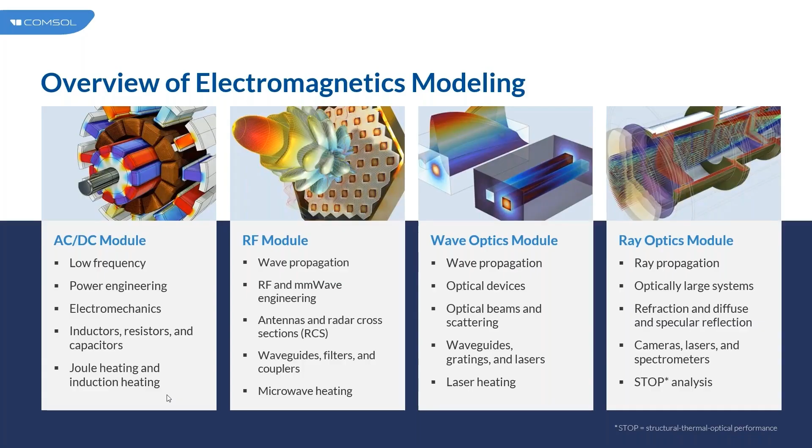Sometimes it's also worth using a small device scale to actually measure the composite behavior of something like this capacitive touchscreen. And for the RF technology, you would want to simulate the underlying antenna and communications going on within this device. So you may also be looking at the wavelength scale, as in this patch antenna that we have demonstrated.

All of this can be done in COMSOL Multiphysics in various fashions. You can have these individual small unit cells, you can have the larger composite geometry, and depending on your particular types of analysis, you can choose what portions of the device you would like to simulate, as well as what sorts of approximations you may want to make.

For example, simulations in just a 1D geometry if you have some type of transmission line behavior, 2D geometries if you have translational symmetry, perhaps a 2D axisymmetric geometry if you happen to have rotational cylindrical symmetry, as well as full 3D simulations, which perhaps is the most common, as in many cases our CAD files don't necessarily have any particular symmetry that you can exploit.

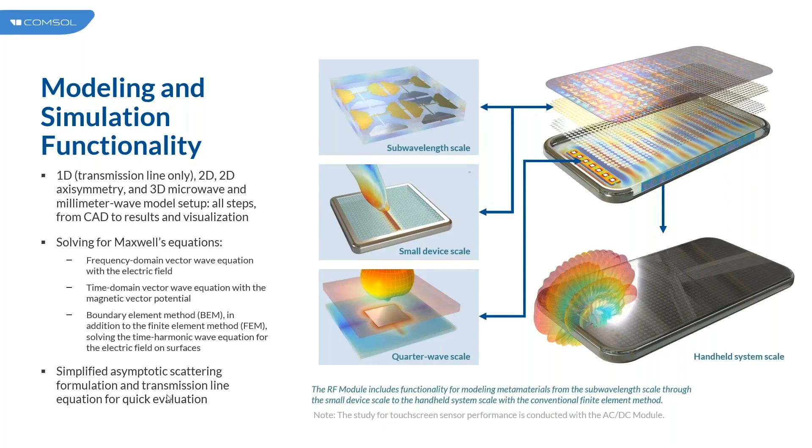As the scales get truly large, you also need to factor in exactly how you want to consider that. As I mentioned on the previous slide, you have the choice between the finite element method and the boundary element method. Generally speaking, the finite element method is a bit more general. It can be used very well when you have inhomogeneous material properties, and that's particularly relevant when you have heating in your model, as the temperature distribution will lead to gradients in your material properties. Finite element method can handle that extremely well.

But as those model sizes get large, it can be very helpful from a computational perspective to increase the discretization order of your solution. That basically means solving at a higher and higher order polynomial that allows you to have a coarser and coarser mesh to simulate these larger structures in an efficient manner. On the other hand, we also have the boundary element method, and this will scale very well with size because you only need to mesh the surfaces of structures.

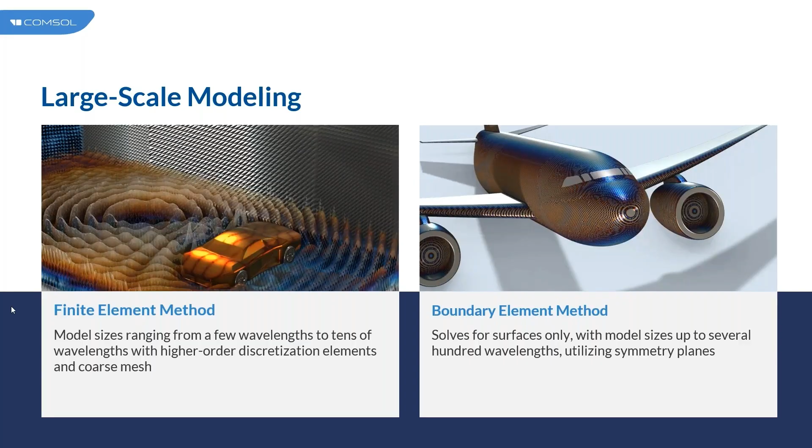For example, in this airplane RCS simulation that you see on the right-hand side, you can see that we are talking about more like hundreds of wavelengths of simulation here. And again, the computational efficiency is obtained there because with BEM, you only need to mesh surfaces instead of volumes. Of course, you can also combine these two approaches into what we call hybrid FEM-BEM modeling, where you have both the advantages of the finite element method as well as the advantages of the boundary element method.

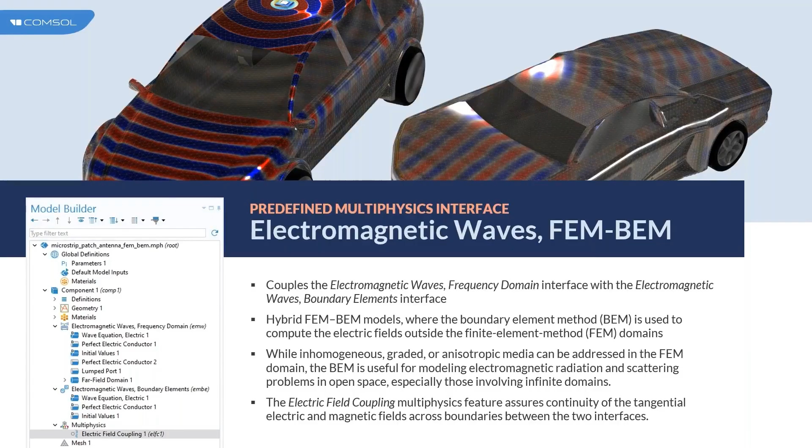And in particular here, you see that we do have two interfaces, the Electromagnetic Waves, Frequency Domain interface. That's what the FEM solution will come from, as well as the Electromagnetic Waves, Boundary Elements interface. And under the Multiphysics section, we have the electric field coupling that automatically handles the coupling between these two interfaces for you.

Of course, ultimately, we're here because we want to look at multiphysics effects. Heating is the canonical case of that. Everyone is very interested in their particular device plus heat. As you put more power into your device, you may obtain better performance, but at some point, you need to factor in the thermal effects. Will the material properties start to change? As conductors heat up, the conductivity will decrease. What impact does that have on our simulations? Or, what is potentially more an everyday scenario?

Again, it's going to be the same interface, the same workflow, all the same steps, regardless of the fact that we are now incorporating thermal effects in addition to the electromagnetic ones. And when we solve these thermal problems, this is typically done in the frequency domain for RF problems, but we need to consider the disparate timescales.

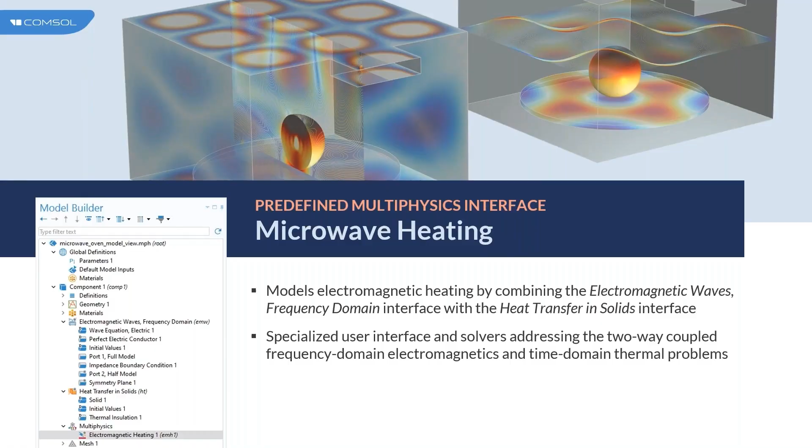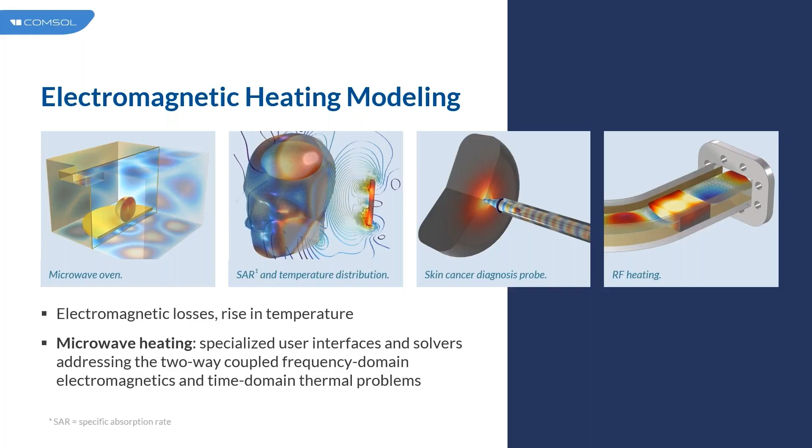We can do things in the biomedical realm, skin cancer diagnosis, or simply RF heating. Maybe you have some type of waveguide, and of course you have conductivity losses in the metal itself. That can all be accounted for in COMSOL Multiphysics.

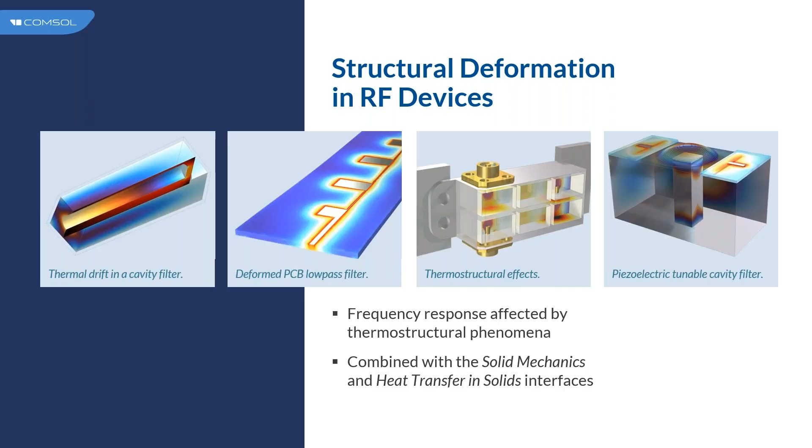You may also be looking at many of the other applications that you see here. I actually think the MRI coil is a particularly interesting one as well, when you start figuring in the effects of passive medical devices inside of an MRI. Will it cause tissue necrosis and that sort of thing?

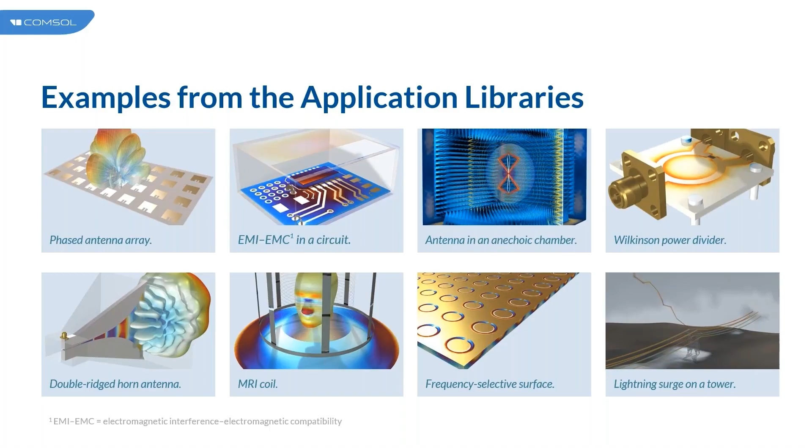All right, at this point, we're going to turn to the previously mentioned example of an antenna array and take a look at what a fully developed COMSOL model of this will look like. And there's a few issues to discuss here. The first is that we're going to excite this structure with a lumped port. This is a very good approximation when your waveguide excitation is much, much smaller than a wavelength.

We're going to account for the outgoing radiation using a scattering boundary condition that basically allows us to have a finite simulation space while still approximating radiation outgoing to infinity.

What we're also going to do in this model is actually demonstrate two different approaches. In one case, we're going to do a full simulation of this 8x4 array and show what that full fidelity model looks like. Of course, the downside of that approach is that more computational resources are required to do that simulation of the full device.

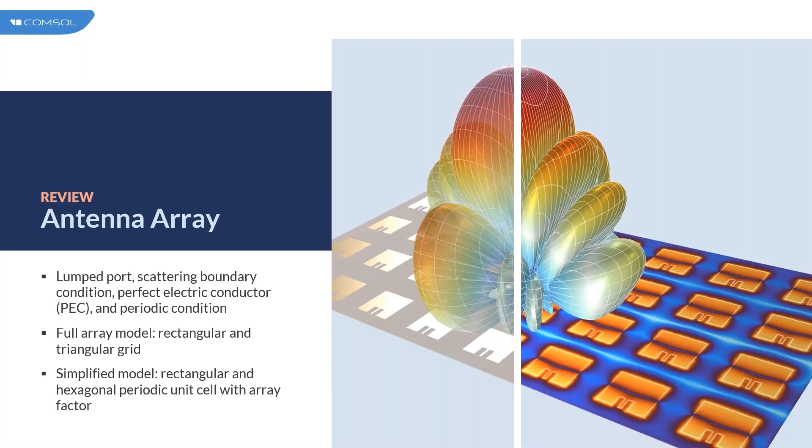And so we're also then going to show a secondary simulation where we only model one individual unit cell and instead use the antenna array factor to generate the radiation profile of the full 32 element array from that one individual element. And of course, as a last step, we will demonstrate the agreement between these two approaches to show that the simplified model of an individual unit cell is a valid approximation.

And so now I've opened up a screen of COMSOL Multiphysics, and we see the exact plot we saw from the slide. In this particular simulation, we're actually applying two different phase shifts to the antenna array to demonstrate beam steering. And so here we see the agreement for an emission at normal angle of incidence. This is a 90-degree angle directly off from the antenna array. And as we change the phase profile, we actually can instead do this emission at a 60-degree angle. And we do see very good agreement between these two approaches.

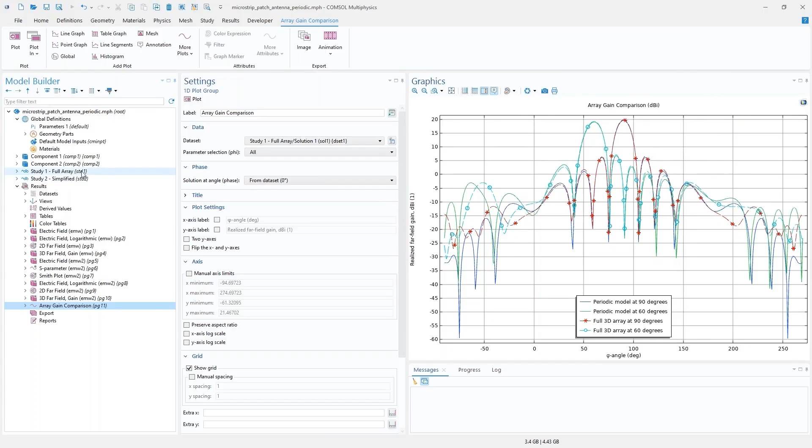So let's take a quick look at how this is set up. Here we have the first component, and we do see the full 32-element array, as I mentioned earlier. The workflow in COMSOL is top-down, and so we'll build our geometry, assign our material properties. In this case, you see it's just a PCB substrate surrounded by air.

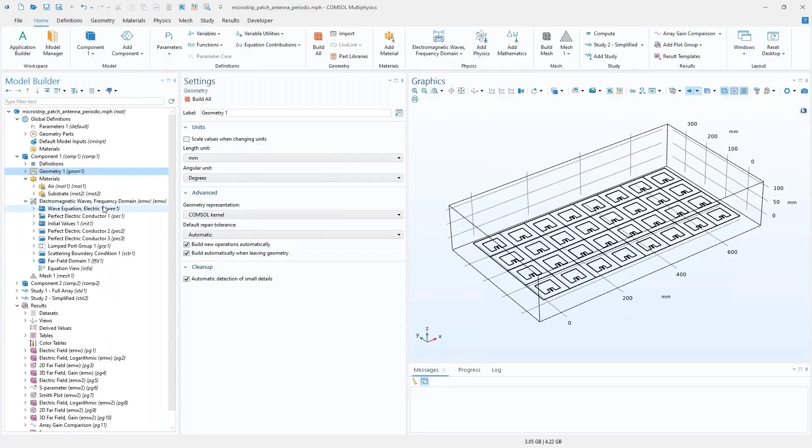Under this interface here, we have the physics assignments. We have a PEC ground plane, which we're just using for demonstration purposes, as well as assigning a PEC to the patch antenna itself. This lumped port group node is the 32 excitations to these individual elements. And as mentioned on the previous slides, we have the scattering boundary condition to handle the outgoing radiation and a far field domain node to calculate the far field radiated profile.

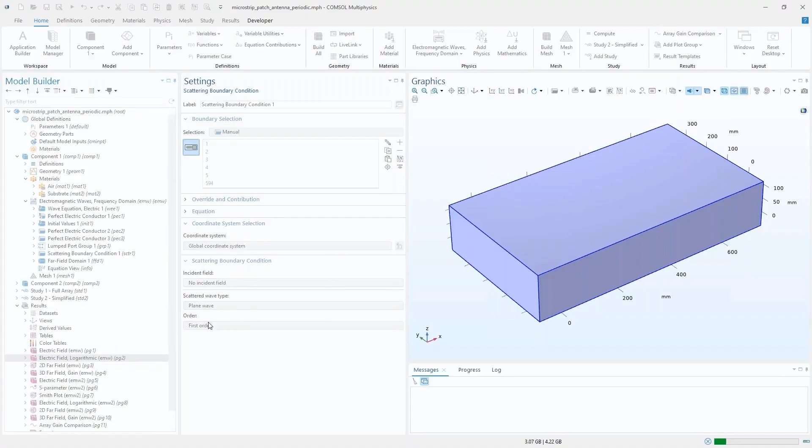We can see quickly what these simulation results look like. Now I'm loading up a quick plot of the electric field profile. Actually, let's look at this plot here instead, which is actually demonstrating the electric field in the Z orientation on all of these patches. And you can see that we have this variation left to right with the phase parameter.

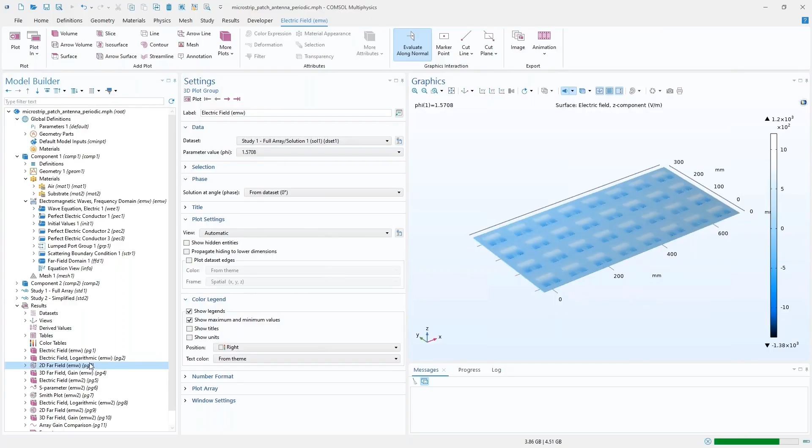If we change this to a different phase shift, we're now looking at uniform excitation, and we do see uniform profiles on these elements. We can also look at the beam steering with a 2D far field plot here.

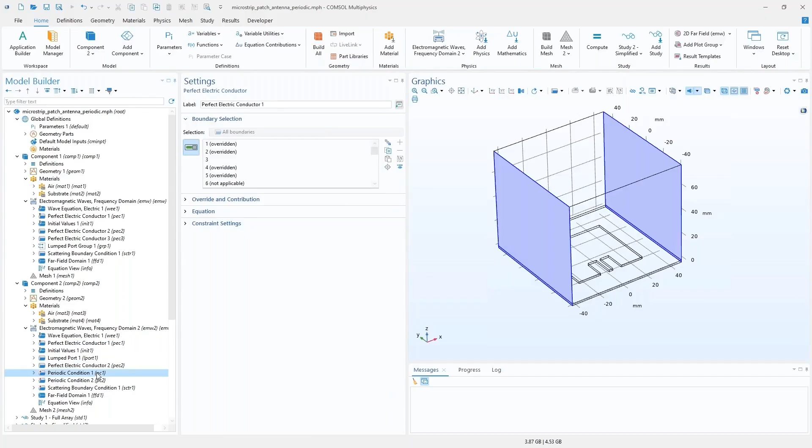For the second component, this is where we are simulating just an individual unit cell. We again have the air and substrate as we did before, but now we only have one individual lumped port because we only have one element that we're simulating. But as before, we have PEC for the patch as well as for the ground plane. On the left and right-hand sides, we're now using the periodic condition to approximate an individual element. We again have the scattering boundary condition and the far field domain calculation.

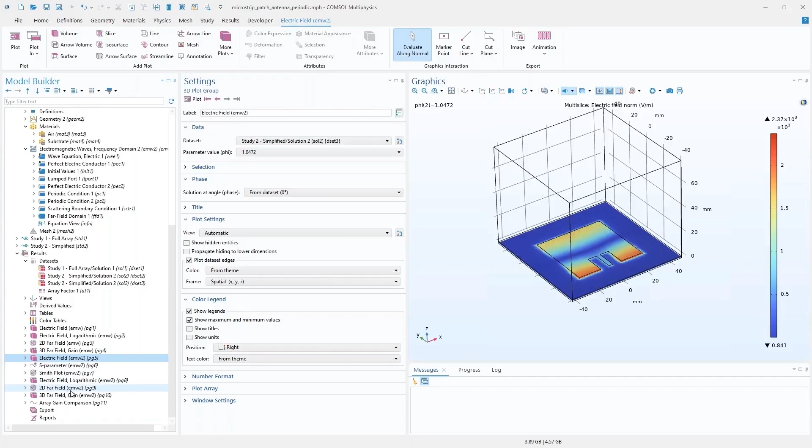If we go and look at the field profiles here, you can see again, we're solving for just one individual element. But what we then do is we create this array factor data set that allows us to generate what the far field emission would look like for the 32 element, the 4x8 array. And again, we can go and look at these comparisons here. We do see good agreement between them there, as well as here in a 2D cross section.

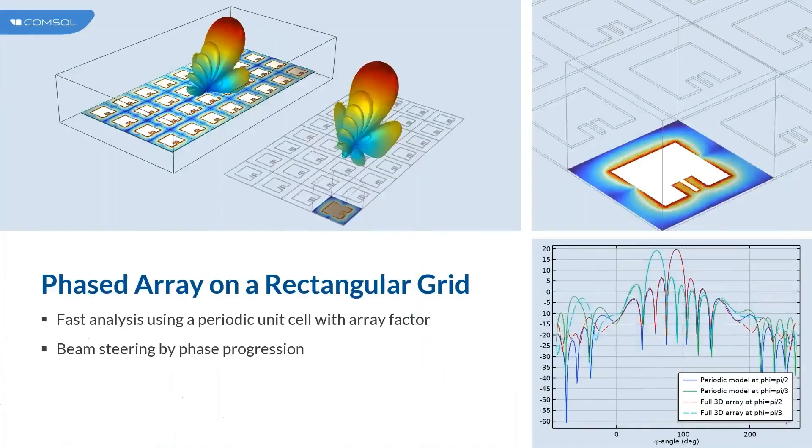Going back to our slides, we also can do arrays for triangular grids. It's very common in satellite applications, as well as in other fields, to have hexagonal arrays. And that can also be simulated in COMSOL Multiphysics. You can both simulate a hexagonal unit cell and then also apply the hexagonal array factor, similar to what we did in the previous demonstration.

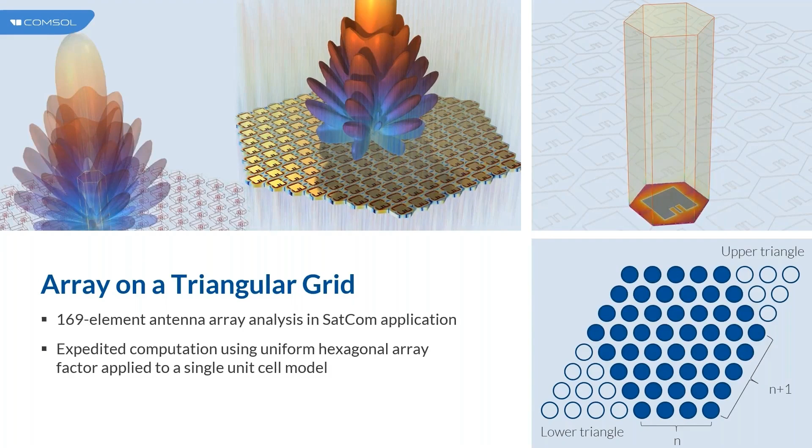It does not necessarily have to be a Cartesian rectangular unit cell as well as a rectangular array factor. It is indeed implemented more generally than that in COMSOL. Turning our attention now again to the multiphysics effects, we're going to look at the thermostructural effects on a cavity filter. We again see the model builder on the left-hand side.

We're again solving our electromagnetic waves frequency domain interface, but notice now that we have a solid mechanics interface and a heat transfer in solids interface with the thermal expansion multiphysics coupling. That's what will take the thermal effects calculated from heat transfer and apply them as structural stresses, thermal stresses in the solid mechanics interface.

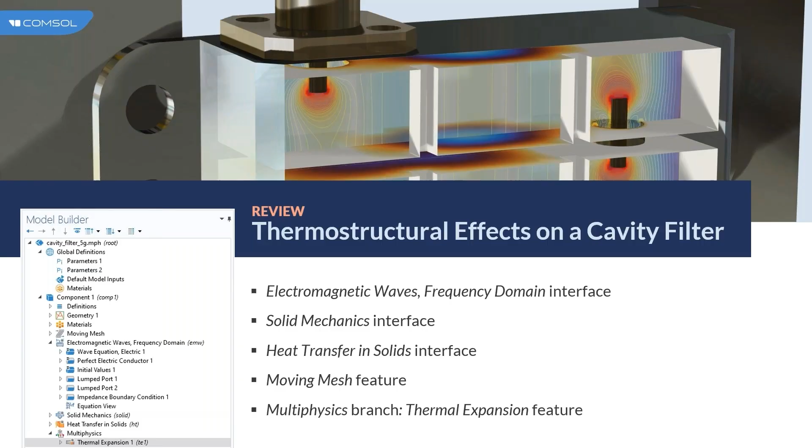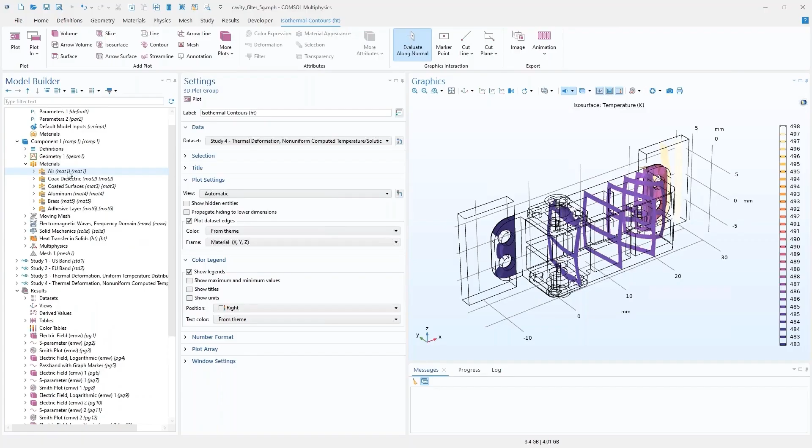Opening the structure here, we can see there's a few isothermal contours, but let's actually go and take a look at the model itself. Similar to what we had before, we have material properties assignments. So you see that we have air inside the cavity filter. We have some dielectric for the interior of our coaxial connections. We have some coated surface. This is just inducing a little bit of conductivity on the inside surfaces. And notice that this is indeed a temperature dependent property.

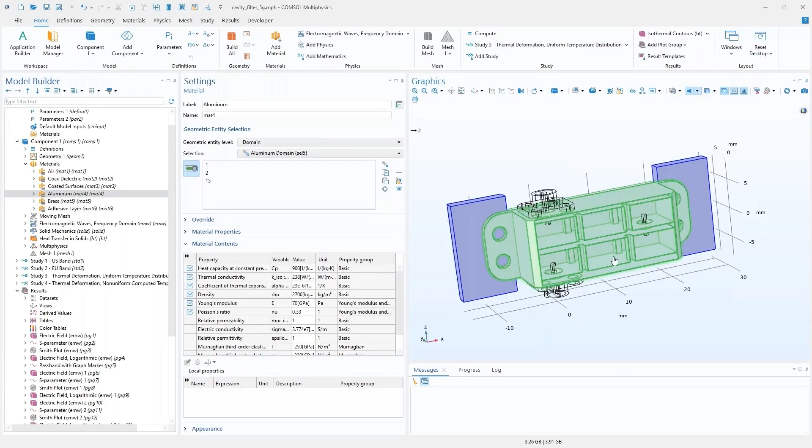The bulk of the filter is aluminum. I should say this front surface here has been hidden. That's why we can actually see into the cavity. We have some adhesive layers as well as brass for our connectors. The electromagnetic setup is relatively straightforward. We have a coaxial feed on the bottom side. We have a coaxial outgoing port on the top, and we are accounting for the thin high conductivity on these interior layers using the impedance boundary condition.

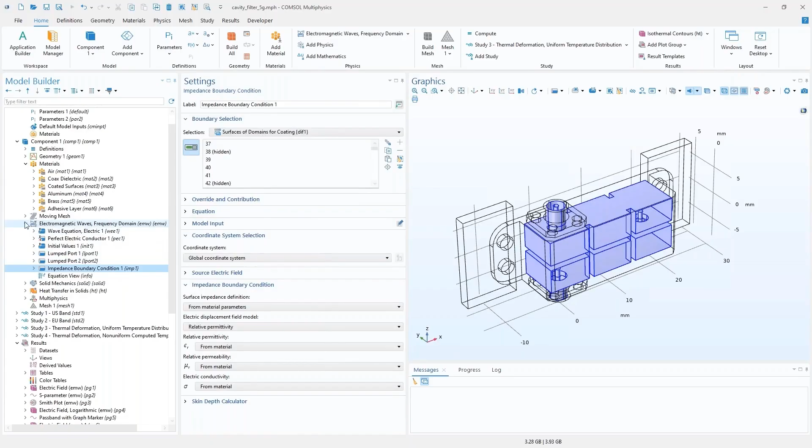For the solid mechanics setup here, we are assuming that we have a rigid connector. Our cables themselves are not moving on the top and the bottom. And we're assuming a spring foundation. This allows a little bit of bend on these adhesive layers that attach the filter itself to the wall.

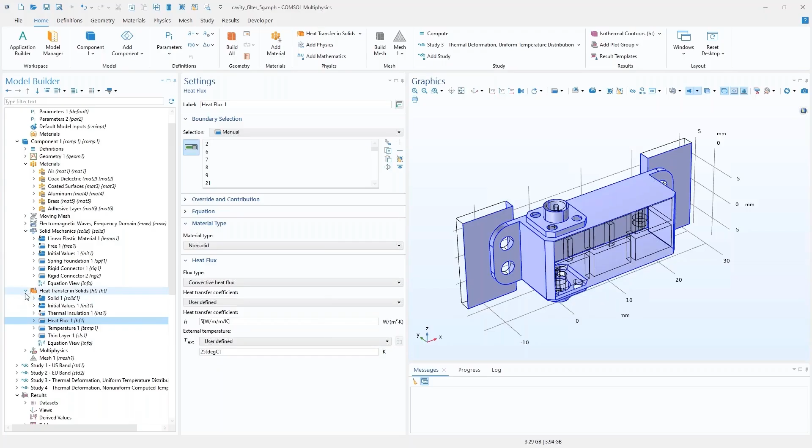For the thermal simulation, for demonstration purposes, we're assuming that the right-hand side is at a fixed temperature. These thin films have a small thermal resistivity as well. And we are also then approximating convection to the surrounding air, simply using an effective heat transfer coefficient of 5 watts per meter squared Kelvin. And again, we have the thermal expansion, which takes the temperature distribution and generates the thermal stresses.

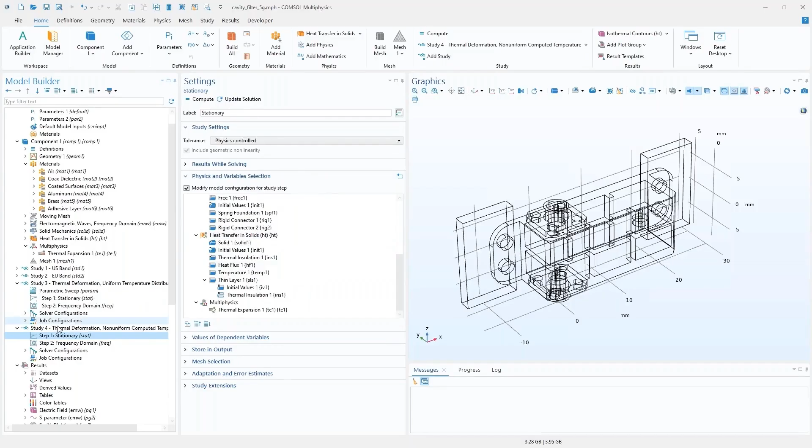We then first solve the structural problem with that fixed temperature. And then on that distribution, we solve the electromagnetic problem. In this last case, we look at a slightly more general case where we actually simultaneously solve heat transfer in solids and the structural problem to get this non-uniform temperature distribution. And again, we perform the electromagnetic simulation on the subsequent device.

We can see some results here. Actually scroll down here to the bottom where we actually do a quick comparison. You see the S parameters for the thermal deformation simulation as well as no deformation. And as mentioned in the slides, we do see that slight shift to lower frequencies.

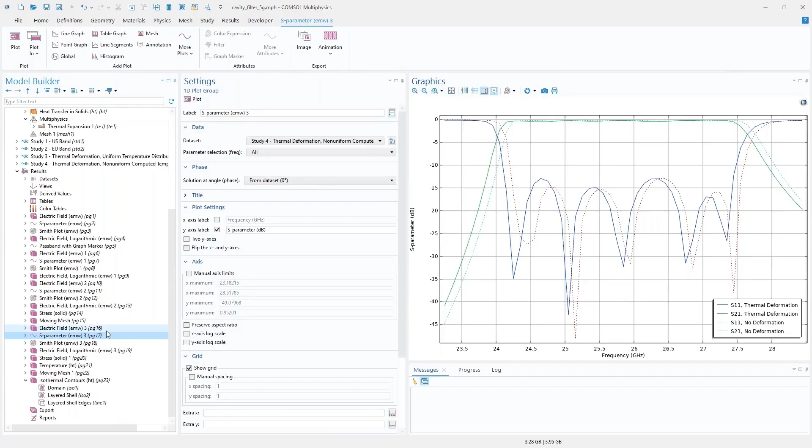I hope you've enjoyed this brief presentation on multiphysics modeling for high-speed connectors and high-speed devices.